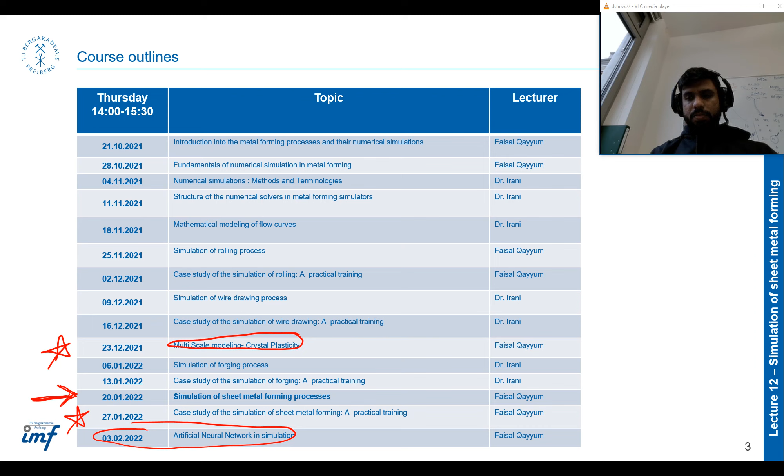In today's lecture, we want to understand what sheet metal is and why its forming is so important. We will also understand the attributes and properties of sheet metal and how they are slightly different from bulk materials. We will learn simple calculations for different sheet metal forming operations, then apply them to solve related problems. To clarify the concepts, I have sorted out some videos which we will watch together and discuss to see what we learned and how the different processes can be helpful.

So we will start with sheet metal forming. That is a very specific technical term. Do you know the difference between a foil, sheet, and a plate? I will start a poll for that: do you know what is the difference between a foil, sheet, and a plate?

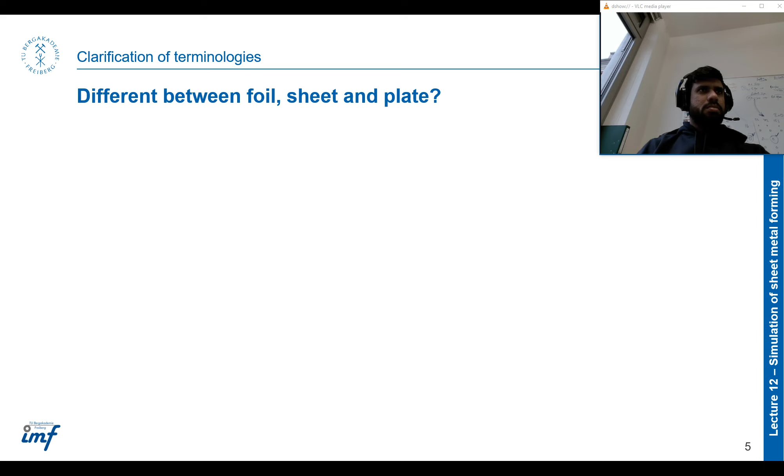So sheet metal with a thickness of less than 0.2 millimeter is considered as foil. Sheet metal with a thickness of more than 0.2 and less than 6 millimeters is considered sheet. So that is the tolerance we will be talking about today, and we'll be discussing it in most of the cases. Blocks with a thickness of more than 6 millimeter are considered as a plate.

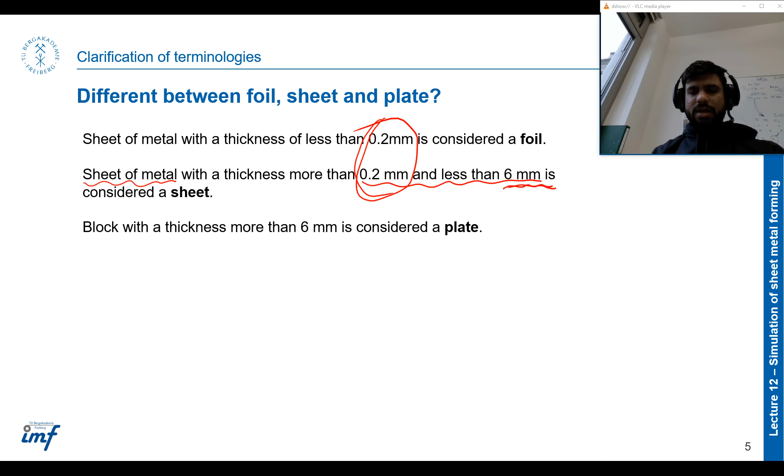I hope that is clear now. So today when we talk about sheet metal forming, we will be talking about these limits between 0.2 and 6 millimeter. Depending on the book, depending on the blog, these dimensions are slightly different. The 6 millimeter is quite conclusive, where all researchers agree, but the 0.2 millimeter can slightly vary. And then I have another question.

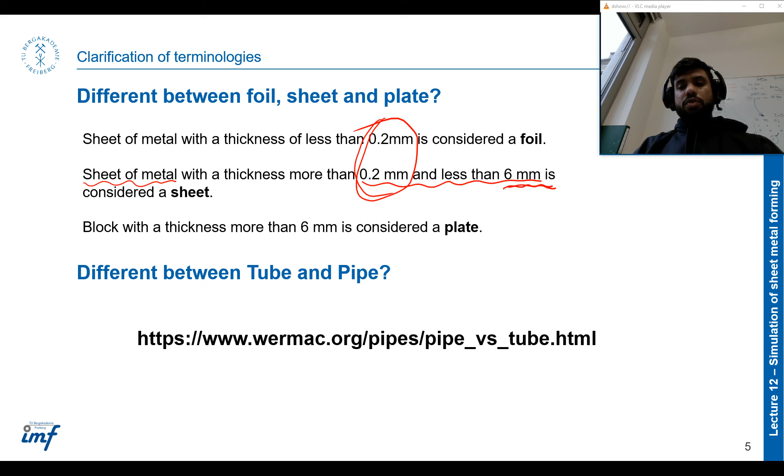I will publish this poll and move on. But if you want to know about it, there is a very nice link with all the details about the differences in pipe and tube, but you can also search it anywhere you want. I intentionally put these questions at the beginning because in your study period, or after you finish this course, you will come across many questions which you won't know the answer to, but will be important to solve a problem or go further. You should have a habit of finding the answers online and doing a simple quick Google search to find out all the answers.

So now that we have defined what a sheet is - basically a thin piece of material with thickness between 0.2 millimeter and 6 millimeter - this kind of shape has specific attributes and properties attached to it. One of the main properties and attributes attached to it is anisotropy.

The students write pipe is a vessel while tube is a structure - true, it depends on how you're defining vessel and structure. Pipe is a hollow section with round cross section for the conveyance of products, including fluid. Yeah, they're all correct answers. But there are many things which distinguish a tube from a pipe, depending on the application, the internal radii, the thickness of the wall, and so on.

Again, this is not the topic of today's lecture, so we are not really going deep into it. But it's important to know that, and you don't have to remember it when you can just do a quick Google search and find out all the answers.

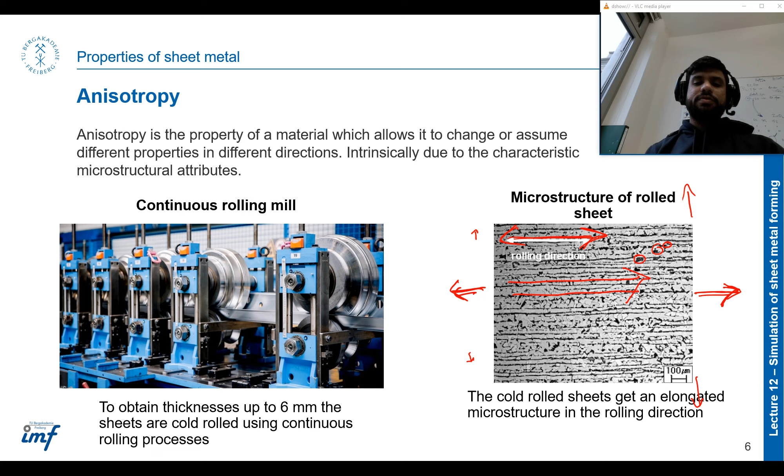So it is always complicated to choose the sheet and understand its anisotropy or do normalization and so on. But just know that sheet metal will have this intrinsic anisotropy attached to it. So we either have to know it or resolve this issue by normalization.

And then the other thing which sheet materials have is they basically are plane stress systems, which means that when there is very little thickness, we can assume that there will not be any stress in the third dimension, the z direction, and all the stresses are basically present in the x and y direction, as shown here in this picture.

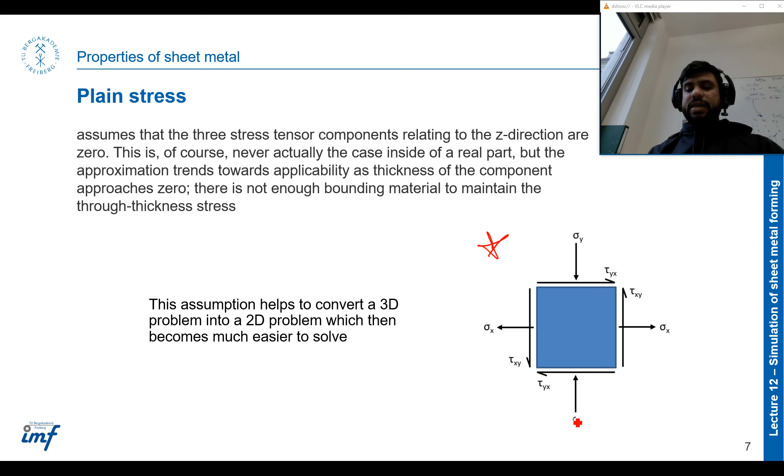So when we apply load in the x direction, we assume that the material will only decrease in the y direction. So if there are positive stresses in that direction, there are only negative stresses in the y direction, and because its thickness is too low, there will not be any stresses in the z direction, and we call this a plane stress condition. Also, for shear stresses, all the shear will only be present in the x and y axis and not in the other axis.

This assumption helps to convert a 3D problem, which it actually is, into a 2D problem, which can then become much easier to solve analytically if we want to do that.

And also, this is an assumption which we take in numerical simulation models, where we take a sheet and along its thickness we consider it as a plane stress sheet, so the computer does not have to solve all the equations in the third dimension but only in two dimensions.

So that makes the equations very short, simple, relatively easier and faster to solve, and yet the results are not much different. Of course, this is an assumption which makes the results slightly different, but depending on the case, the results are not highly different, and we can get the desired results quite quickly. So that is also something attributed to sheets, that generally the plane stress condition exists in them.

And after the assumptions, let's come to a point on why sheet metal forming is so important. When we want to discuss this, it is important to understand that our lives are surrounded by sheet metal components, for example automotive body parts, aircraft frames, and major home appliances.

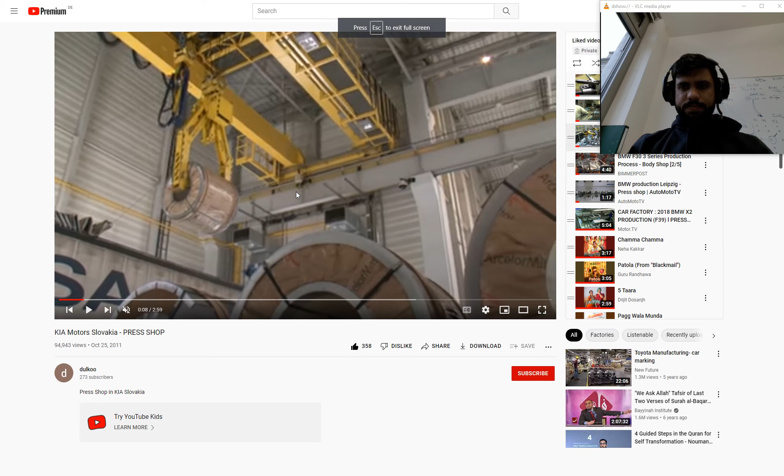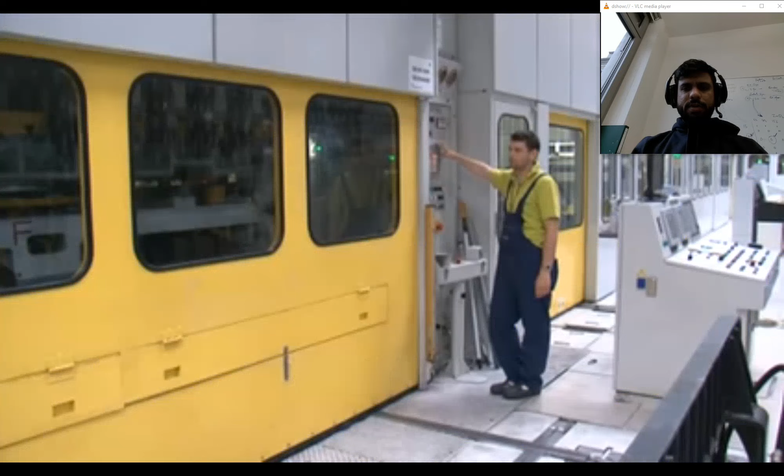So this is an example of how the car body parts are generally manufactured. So you see here that all the sheet metal rolls are coming into the industry. Here they are being unwound. The roll is being opened and then fed into the cutting press, which does blanking.

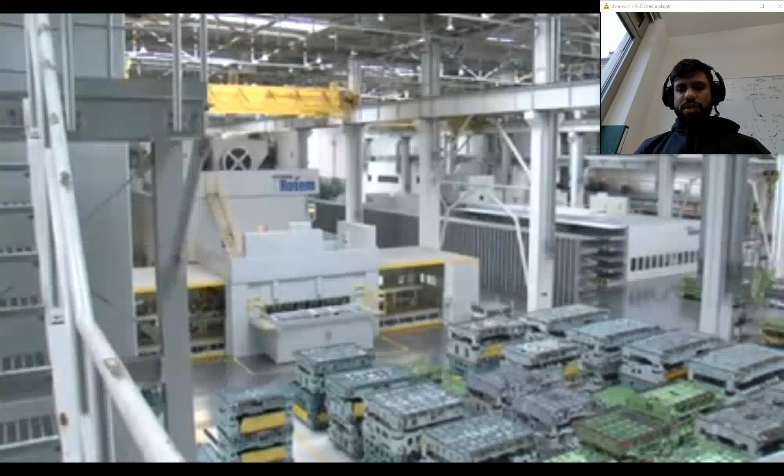The process is called blanking, where sheet metal parts are cut out of the whole big product, and now they're being stored in the store for later use. And here you will see the press shop.

These are the dies which are used to do the sheet metal bending and drawing and all those steps needed to convert these flat sheets into the desired shape.

So now those cut parts are being fed to the press. What is happening here is that the dies are being sent into the press. So now you will also know the trends of Industry 4.0 and automation, where the dies are automatically going in depending on which parts we want to manufacture, and then those flat parts are being fed into different dies.

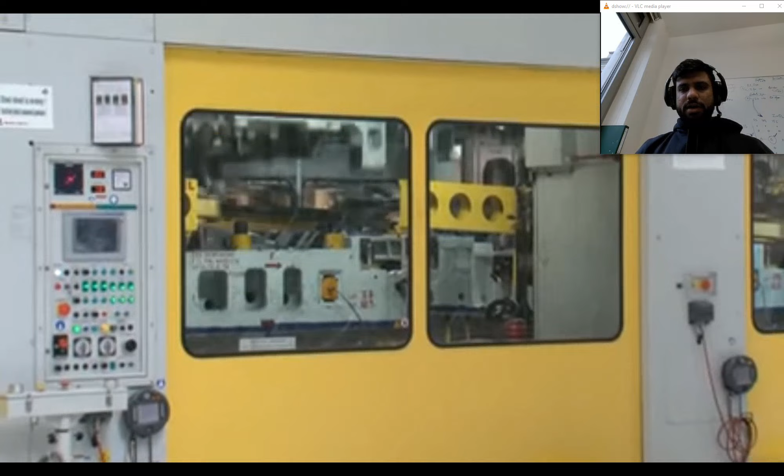Are being formed at different steps, and then you see here that the formed parts, the sheet metal formed parts, are coming out. So this complex forming is not done in one step, it is done in multiple steps. It is a combination of sheet drawing, sheet bending, shearing, forming, and in the end we get these kind of complex shape parts.

The example is for a car, and then these parts are being stored in the store again for later use. Depending on which model they want to manufacture, depending on how and when and where the model is being manufactured, different parts are then extracted from the stores and shipped to the site where they are used.

But the video ends here, where they are doing an automatic inspection of the part with a 3D scanner, which shows how the tolerances of the shaped part compare with the actual geometry they gave in.

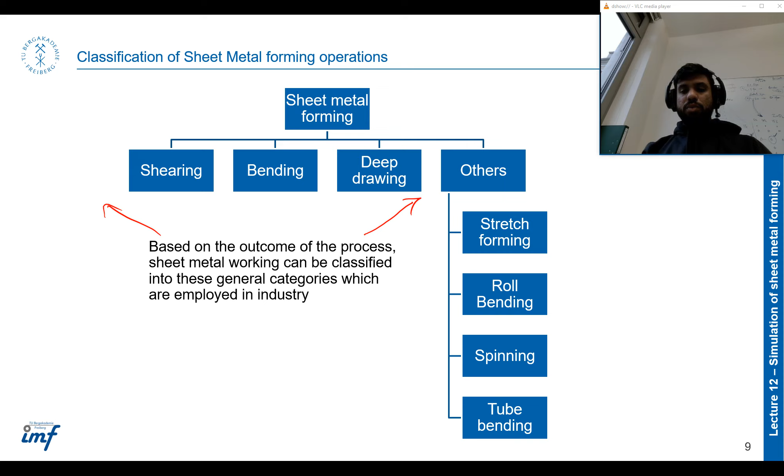The sheet metal forming operations can be generally classified into the following categories. Based on the outcomes of the sheet metal working, they can be classified into processes where one is shearing, one is bending, and one is deep drawing. We will study them one by one, and see what they are and how they perform.

On the other end, we also have operations performed without presses. These operations are basically stretch forming, roll bending, spinning, and tube bending. That is also something which we will study today, probably not tube bending, but all the others.

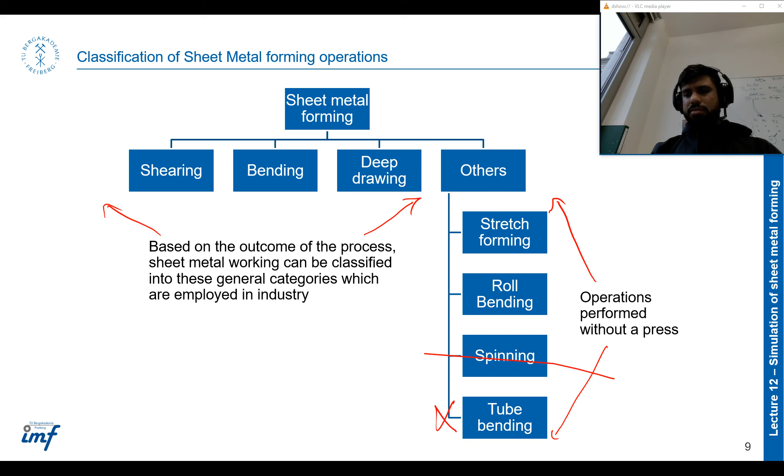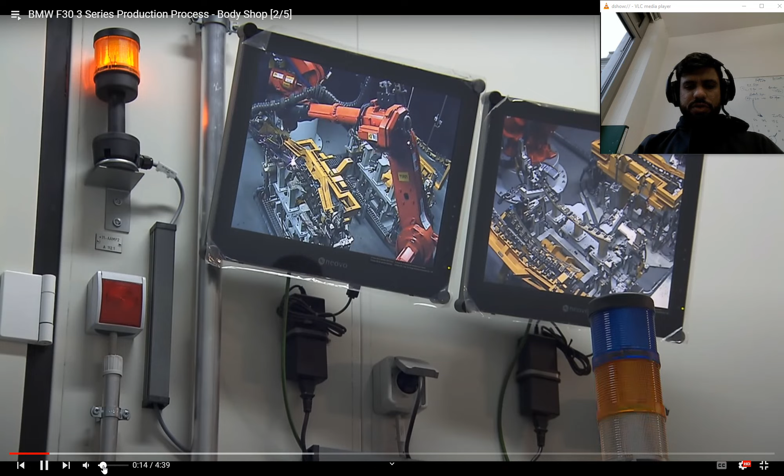In the previous video, you saw how the rolled sheet metal comes into the factory, how it is blanked into the desired blocks, which are then used to form and make into the desired shapes. Now this is basically the next step which comes in car manufacturing.

All those blocks come down from the store into the assembly plant, where you will see the robotic arms actually picking them up from the conveyor belt, putting them in the jigs and fixtures at the right points, and then welding them together to form components which will later be used in the cars.

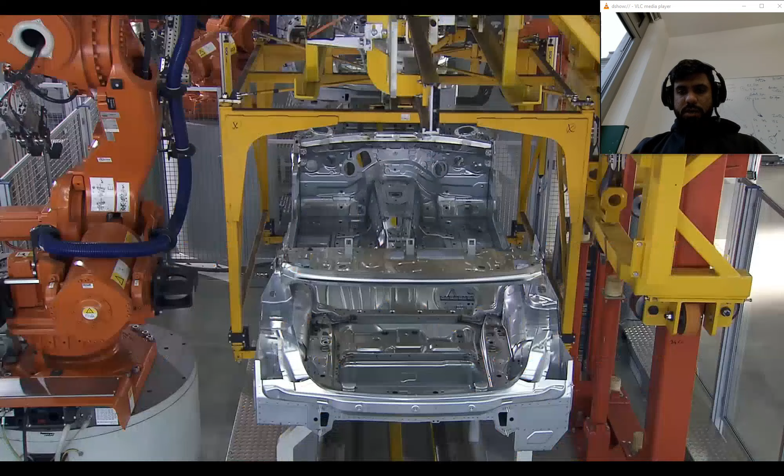There is a big skip here, but generally you see how those components, individually built together one by one and welded together, form this basic car frame. A lot of operations are going on, where parts initially joined with a few spots are then welded together more strongly using spot welds.

This is the basic car frame, and the process goes on where it slowly takes the shape of a car. Spot welds are still going on, and if you look at this structure, more than 95% of the components are sheet metal parts joined together using spot welds—a few are just bars.

The video will go on to include more larger components to this block, and it will directly take the shape of a car. I'm just waiting for that to happen.

On the punch and die, I want to show it to you. Let's see where I can show that - we can start a whiteboard and clear canvas.

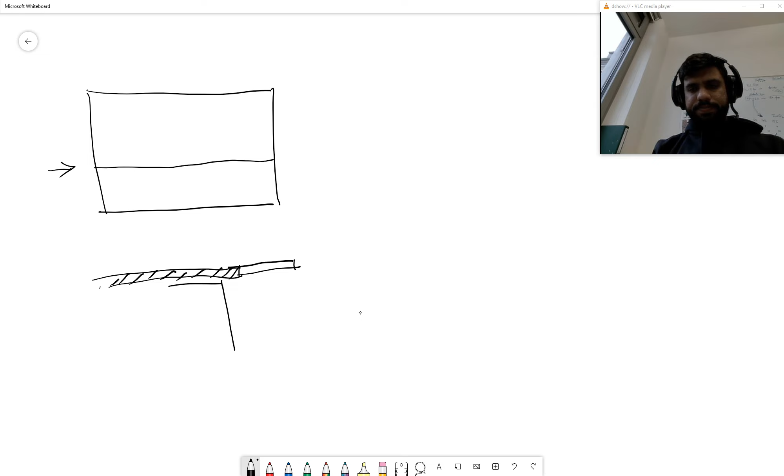Okay, so for example, if we look at it, let's take an example of a sheet which I want to cut from here. If I put it between the die and the punch from this side, it will look like this - this is the sheet, a little longer, and this is my die, this is my punch. And from the front, if I look at it from here - so this is the side view and this is the front view. The sheet is here.

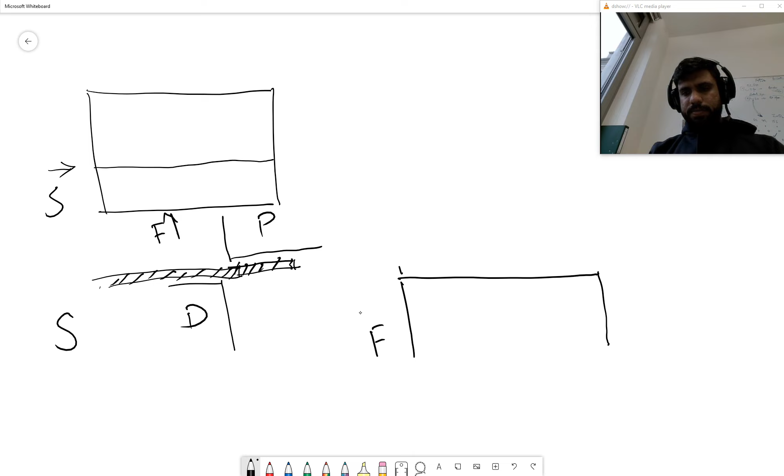This is the die, and my punch is like this. So when I press it, it will simultaneously be in contact with this whole length, and it will cut it. But this will result in maximum force. And what we do instead is...

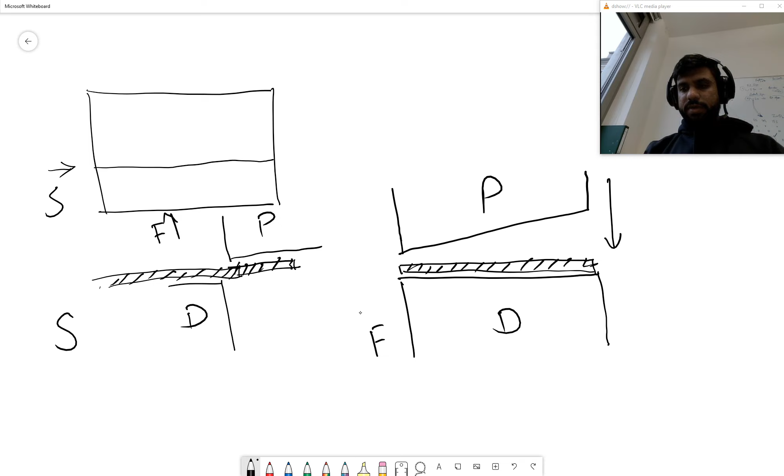We use this kind of punch. So what it does is it comes in - when we press it, it comes in contact with only this section of the sheet, and then when this is cut, it comes in contact with this section of the sheet and this section of the sheet, and that is how we reduce the amount of force needed for the shear. And similarly, we can also do it for a circle and so on.

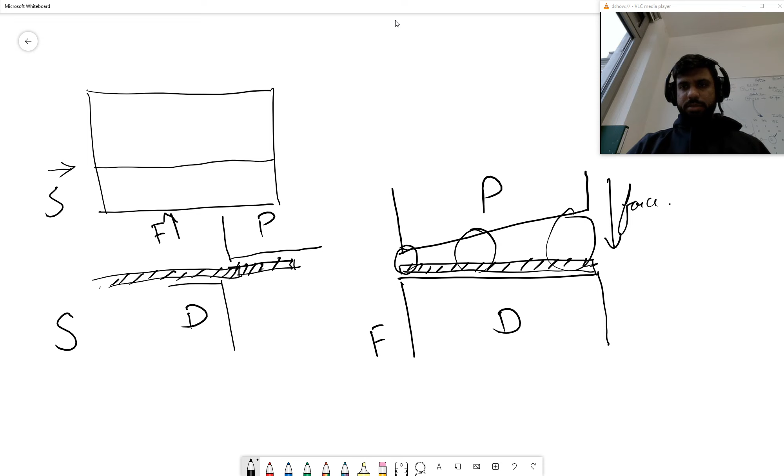I hope it was understandable with this kind of schematics.

So this force calculation is basically for the total complete cut. Of course, it can be significantly reduced if we do incremental cuts. Like in the case of scissors, when we cut something, we require very little force because we are only cutting a very small area, and then we incrementally do that. The total amount of energy required will still be the same, but the amount of force required at one moment will be smaller.

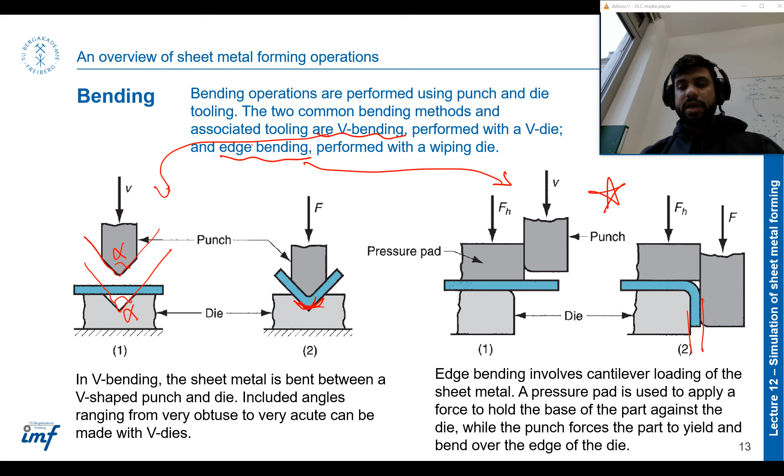Now in both these cases, there is a difference in the angles, and for example, in this case, there is a gap between the die and the punch, and this is called clearance. We need to cater for this depending on our angle of bending and so on, and we call that bending allowance.

It's important to understand that if the bending radius is small relative to the stock thickness, the metal tends to stretch during bending. So, for example, if I want to bend a sheet, let's try to make it as close to reality as it would be, and I will put my punch very close, and then I would try to force it.

What will happen is that this sheet will get thinner at this edge during bending, and that is what we don't want it to do, because it will reduce its strength.

So what we want to do is calculate this - we call it AB, bending allowance. We want to calculate it more accurately, so we can give this bending allowance between the die and the punch while bending our sheet, so it does not stretch and does not lose its strength.

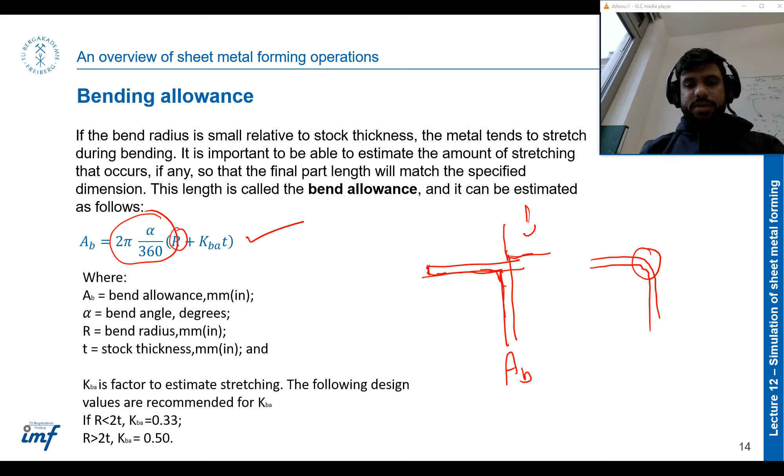And the formula to do that is given here, which seems relatively complicated, but it is quite simple, where this is basically a calculation for the bending angle, and this is basically the radius of the bend. So there are two things - let's take an example of this.

So one is this angle alpha, which is given here, and the other is this radius of bending. And then of course we have our thickness of the sheet, and then there is a constant factor to estimate stretching. Generally, the following design values are recommended: if the radius is less than 2 times thickness, this value of Kba is used, and if the radius is greater than or equal to 2 times the thickness, then we use this other value. From this formula we calculate the bending allowance.

There is also an intrinsic attribute called spring back, associated with the sheet metal bending operation. Because what happens is that when we deform a material, there are two components: one is the elastic deformation and the other is the plastic deformation. Plastic deformation is the permanent deformation, and elastic deformation is the one which is elastically stored and then just recoils when we remove the load. In the case of bending, this is quite significant, so we want to calculate the spring back in our sheet metals.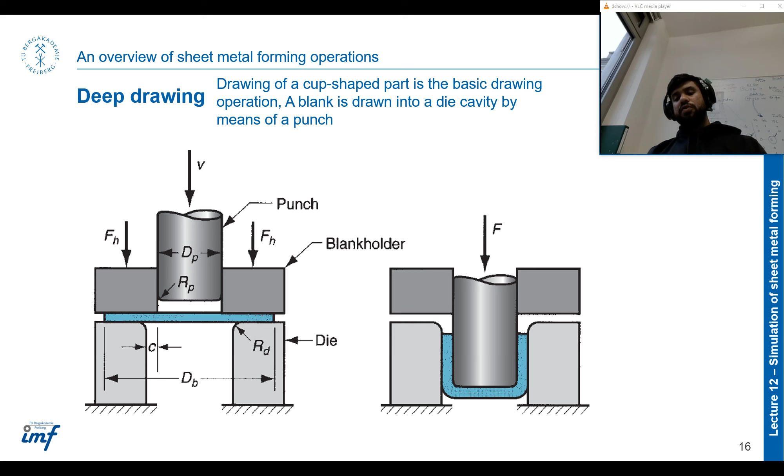The details of the process are given here. For example, when the punch first begins to push the work, the material is subjected to a bending operation — we see bending taking place here and here. Then as the punch moves further down, in case of this figure, a straightening action occurs: there is a bend first and then it becomes straight here, where it was previously bent over the die radius. This causes a strain hardening effect in the material because we are bending it first and then straightening it later, which makes the wall of the drawn part relatively stronger than the lip or the bottom of the part.

Then what happens is that for the material in the flange to move towards the die opening, the material wants to flow in. There are two kinds of forces acting: one is a hoop stress here at the lip of the part, and the other is the tension which is pulling the material inwards.

The surface of the blank holder and the die matters because for the material in the flange to move towards the die opening, the friction between the sheet metal and the surface of the blank holder and die must be overcome.

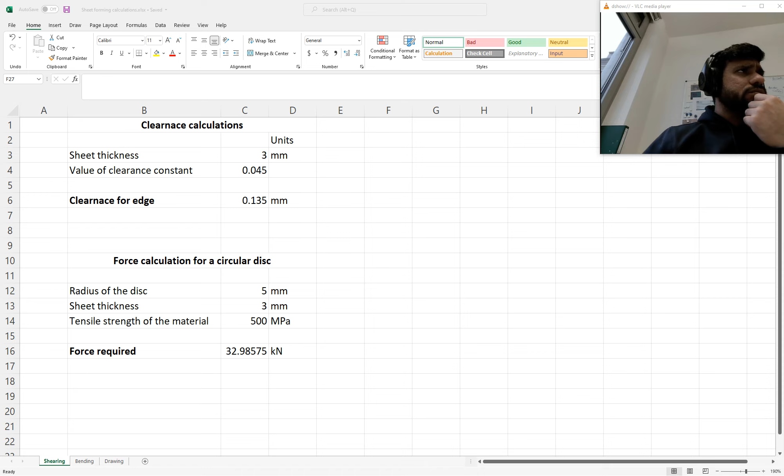What I would like to do here is show you that this Excel file contains three different sheets. Below here, if you take a look, there are three different sheets: one is shearing, the second is bending, and the third is drawing. The formulas we saw on the slides have been incorporated into this.

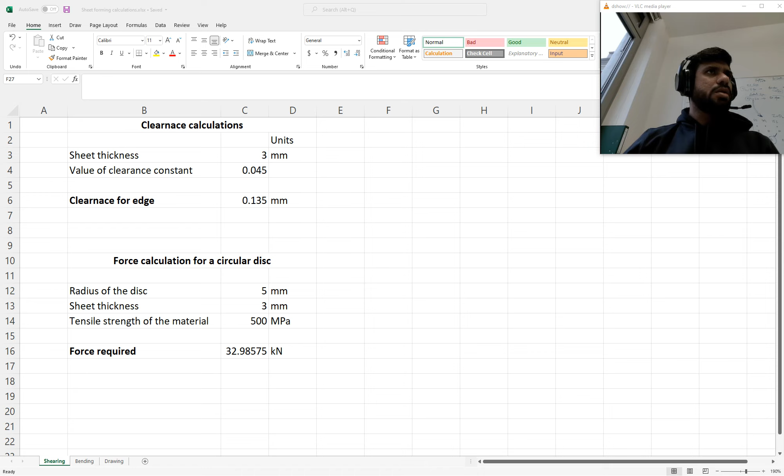So what I've done is I have incorporated them here in this list, in these individual sheets, and you can play around with them. For example, if you want to do some shearing calculations, you can write the thickness of the sheet, which can be, for example, let's say...

4 millimeters, and the value of the clearance constant. Do you remember we studied about it? If the material is very soft, the value is 0.045. It's a drop-down menu, and if it's medium hard, the value is 0.06, and if it's very hard, the value is 0.075.

Let's assume the material is super hard and the value is 0.075. Then the clearance for the edge should be 0.3 millimeter for a 4 millimeter sheet. And if it's 0.06, then the clearance can be less, and for 0.045 the clearance can be super low.

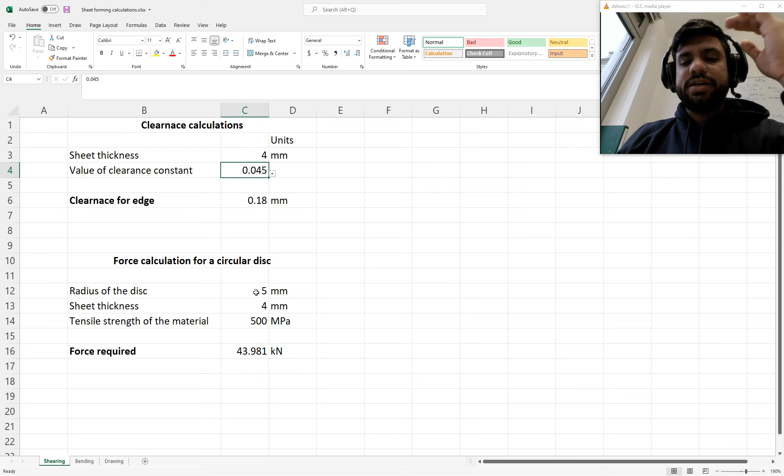Okay, and then what we want to do is force calculations for a circular disc. I'm doing the force calculations for a circular disc, but you can also make a similar sheet for straight cuts. So I say here that the radius of the disc is, let's say, 7 mm, and the sheet thickness is, let's say, 2 mm.

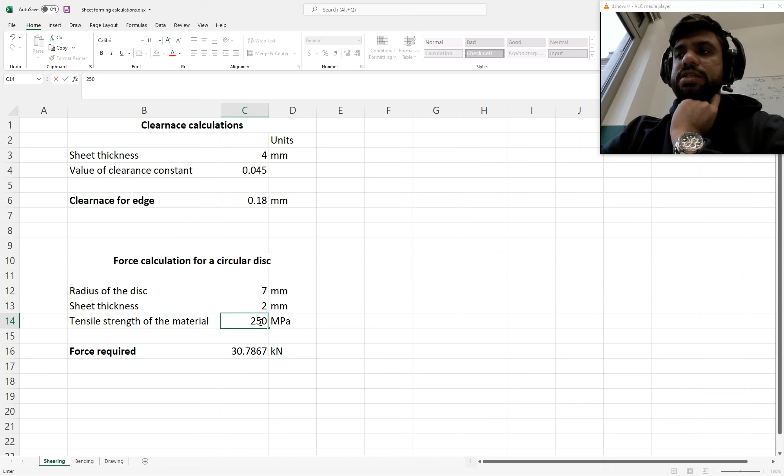And the tensile strength of the material depends on the material, and you would know that from testing the material, which is also something we've discussed before. But let's say it's a very soft material and the tensile strength is 250 MPa, then the force required to shear the sheet all at once is 15 kilonewtons.

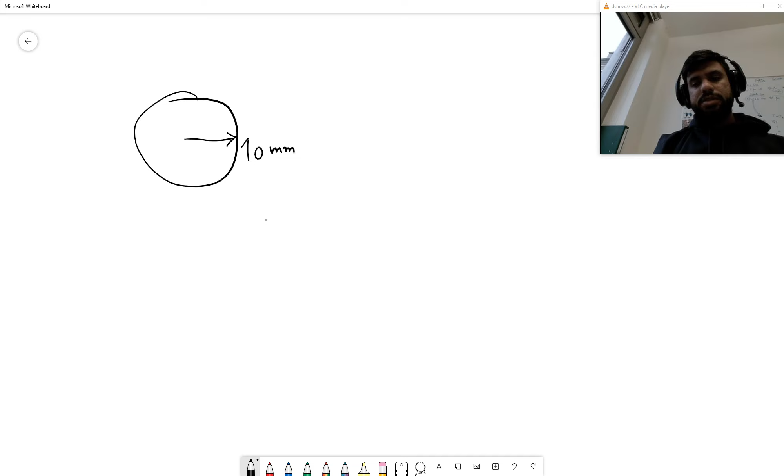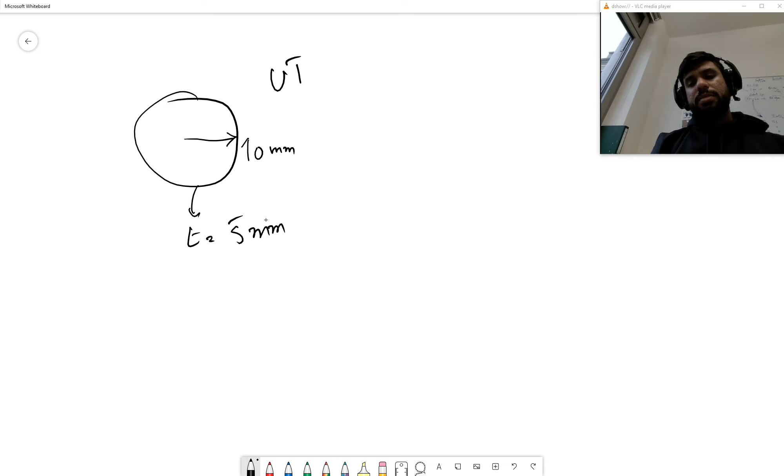Now let's do another case study. I want you to do a calculation for a round sheet which is 10 millimeters radius, and the thickness is 5 millimeters, and the ultimate tensile strength is 400 MPa.

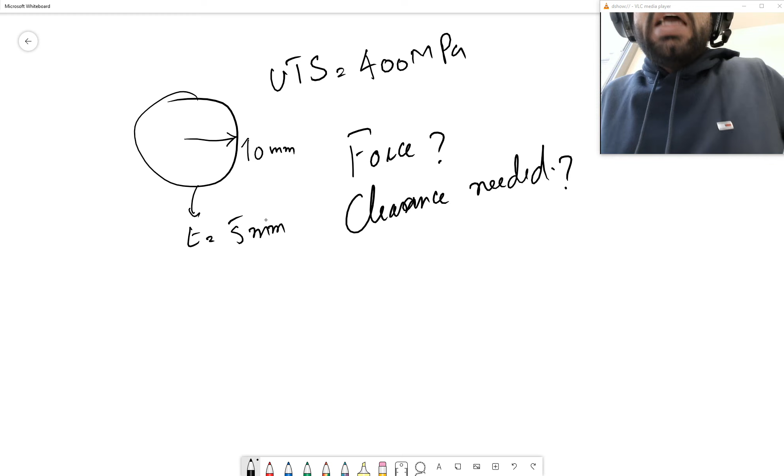I want you to find the force required as well as the clearance needed for this case. You can just quickly do these calculations using the sheet, and write your answers in the comment section here, and then we can move forward with the further calculations.

Clearance is 0.3 and the force required is 87.962 kilonewton. Interesting, but for the clearance, which hardness of the material did you choose? That is what I would also want to know, and why.

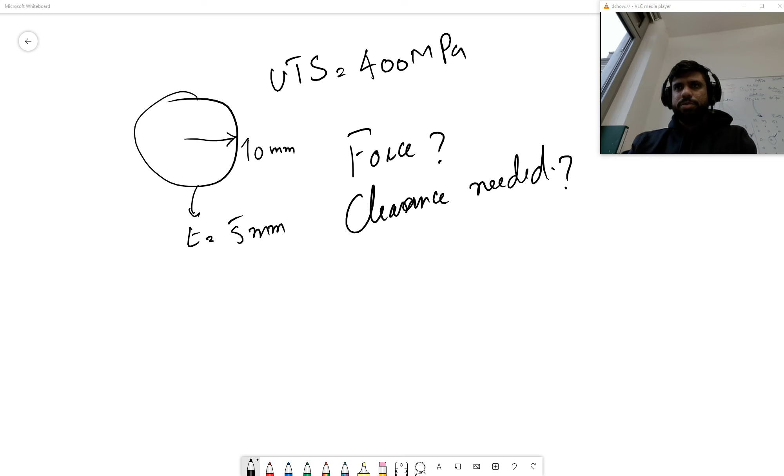Super, that's good to know. And interesting, I see you are getting along. Okay, so now we have a different clearance, 0.225, and of course it would vary because of the value of the clearance constant which everybody is choosing. But it's okay and good.

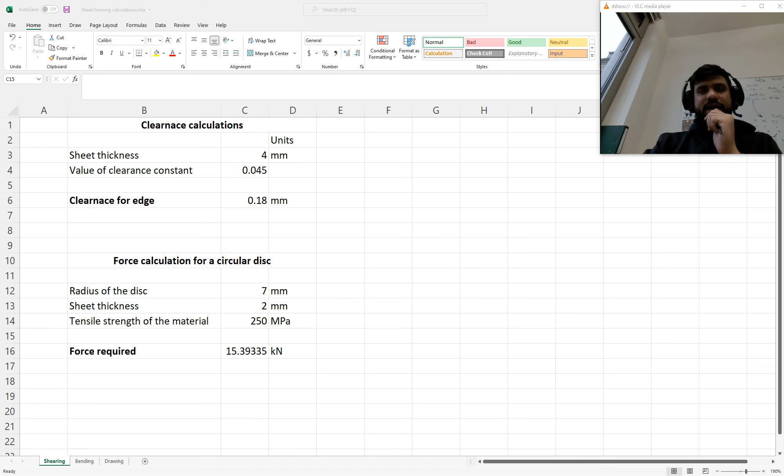Now let's go to the next sheet, on bending. There are other calculations for bending, but here we are just doing very simple basic calculations, putting the values of what we need. So let's say the bending angle of the tool is 70 degrees, and the bending radius is relatively larger, let's say 7 millimeters, and the sheet thickness is relatively higher...

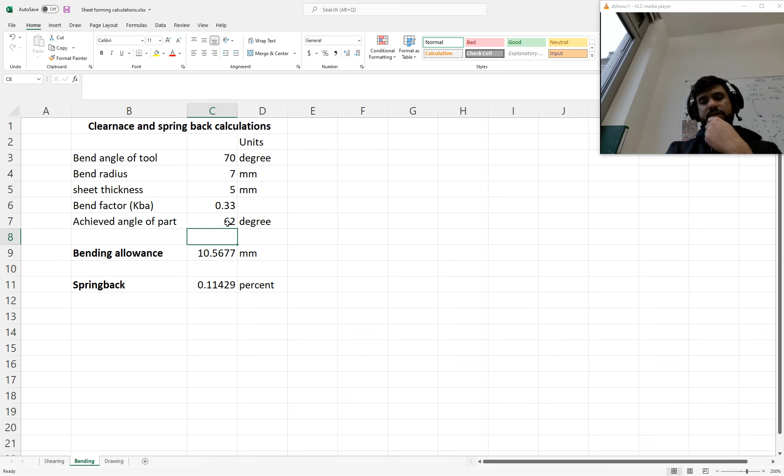5 millimeters. Here I have applied a conditional, so the bending factor is automatically chosen based on the values we give, and then the achieved angle of the part, let's say it was supposed to be 70 and we achieved 62 degrees. So we see that the bending allowance should be 10.56 millimeters, and the spring back in the sheet, depending on the achieved part angle, is around 11%.

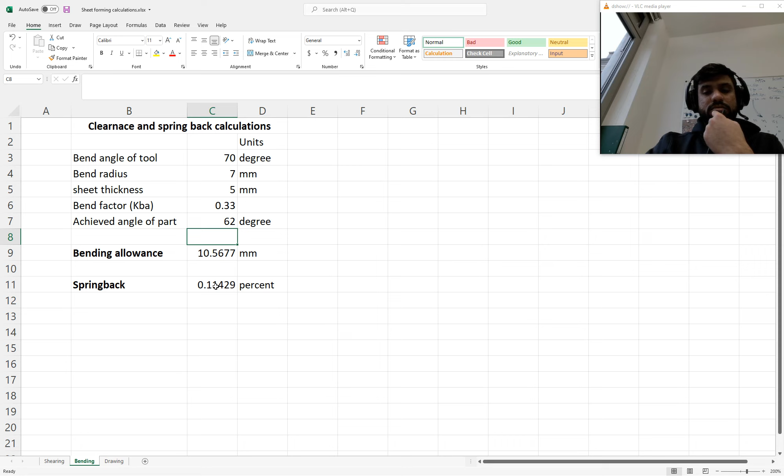No, this is not correct. It is basically not in percent. So this is basically a 0.11 ratio, which corresponds to 11%.

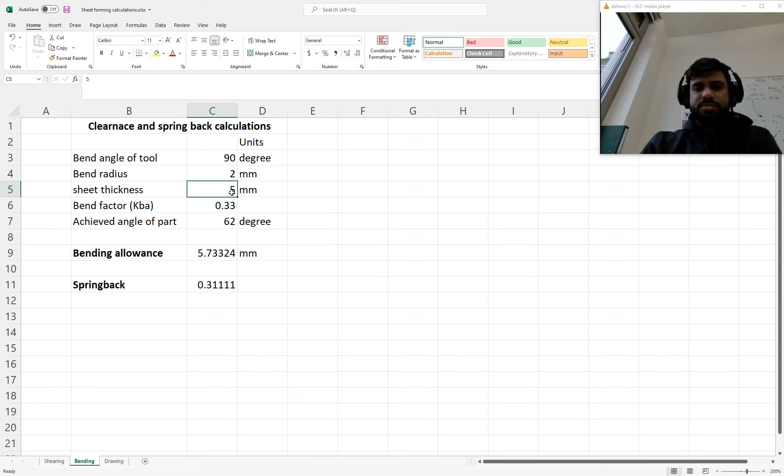Now let's take another example where we are bending it to 90 degrees. The bend radius is quite small, 2 millimeters, and the sheet thickness is also 2 millimeters. The bending factor is still 0.33, and the achieved bend angle in the sheet is 80 degrees. So we see that the bending allowance is 4 millimeters only, instead of 10 millimeters as previously. This is how you can use this sheet to your advantage.

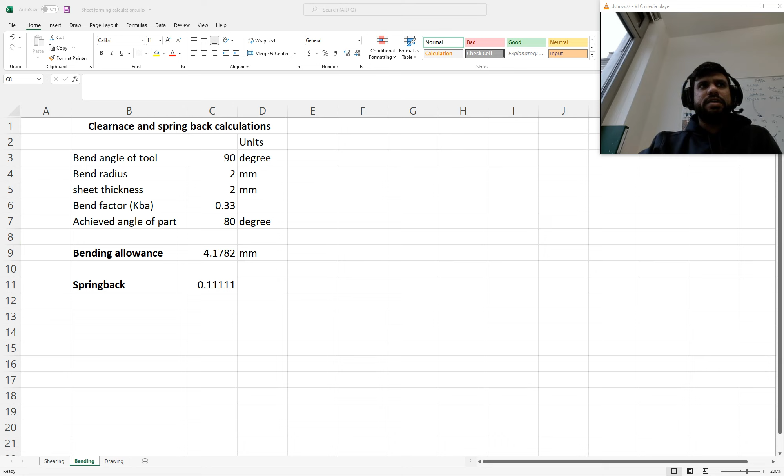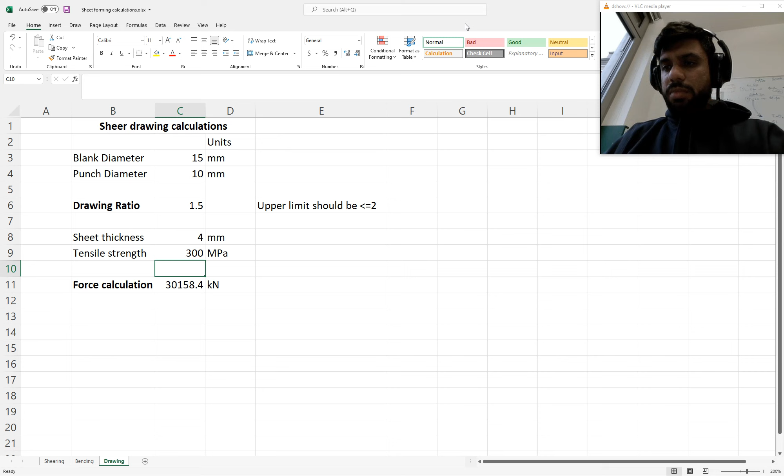Now, these are the basic general sheet forming processes, and we want to talk a little bit about special processes.

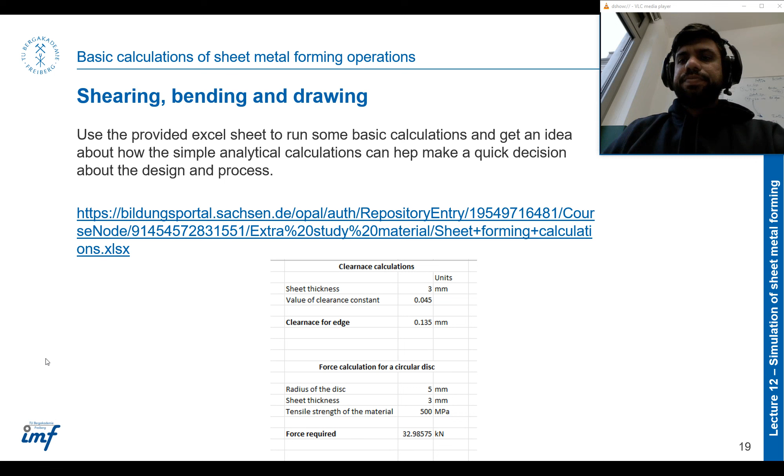Then there is the roll forming operation, which basically uses a combination of rollers. It's a continuous bending process in which opposing rolls are used to produce long sections of formed shapes from coil or strip stock. Several pairs of rolls are usually required to progressively accomplish the bending of the stock into the desired shape. There is a very interesting video about it.

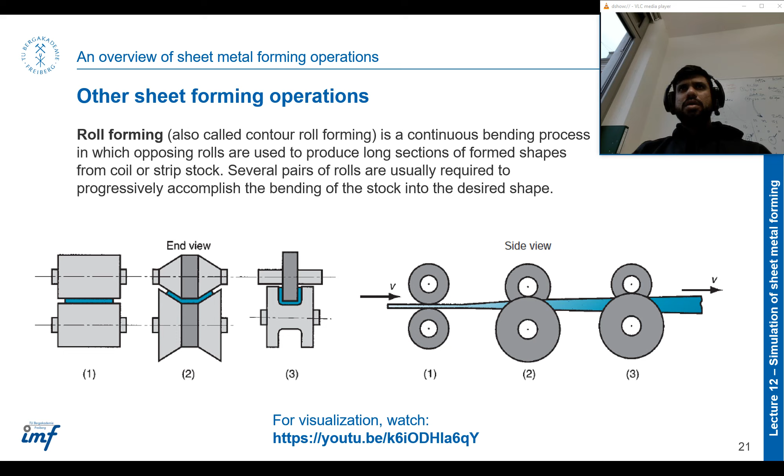Let me see, where is that roll forming video? Yes. So let's watch this video together. Oh, come on.

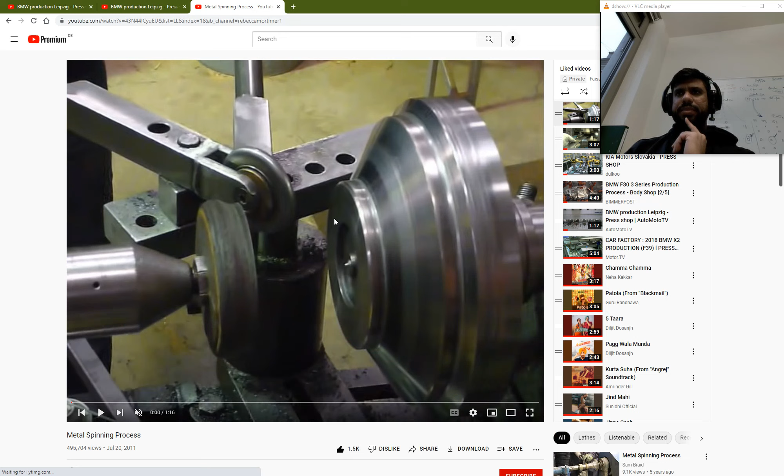Okay, interesting. And then what I would like to quickly reach is, where was I? Yeah, and then I would like to quickly address metal spinning.

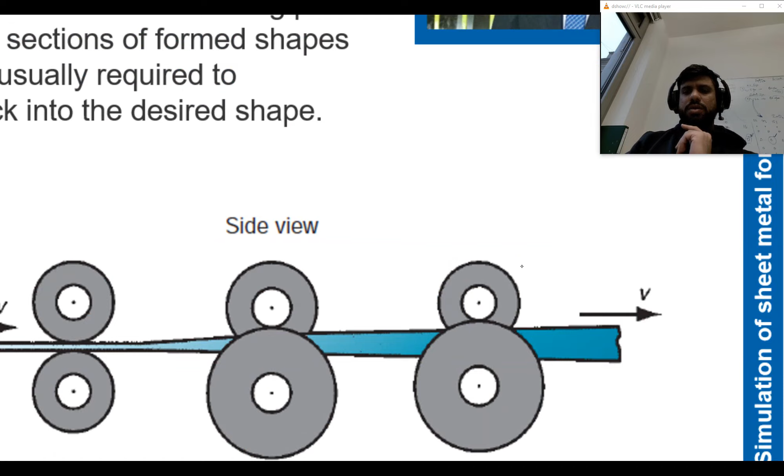Metal spinning is a method of forming rotationally symmetrical sheet material parts. In spinning, sheet metal discs are formed into rotationally symmetrical hollow shapes. The blank is clamped between a clamp and the die. The die rotates at very high speed, and we use a rolling tool to shape the sheet metal onto the die, and in the end we achieve our parts. I found a short and interesting video to explain this concept as well, which we can see here.

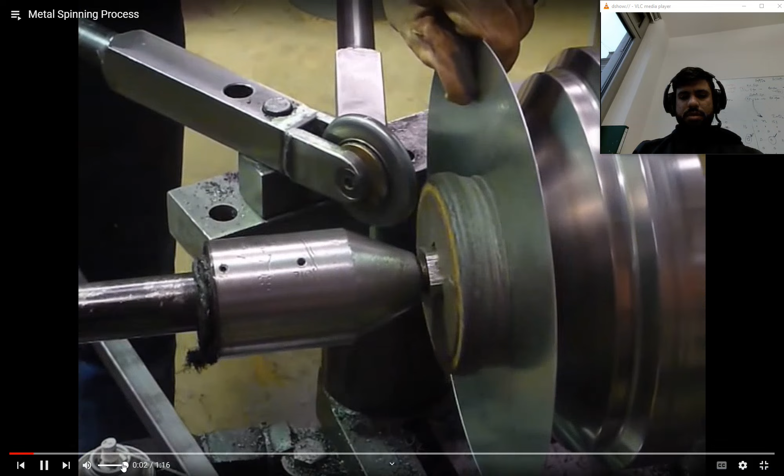Here you will see that sheet metal is held between a clamp and a die, and then we have a forming tool which is used to shape this sheet and cover it over the die. Then you will see there are different steps involved in shaping it more accurately and precisely. Here the work is being done manually, but of course it can also be done using a numerically controlled or computer numerically controlled machine with more accuracy and consistency.

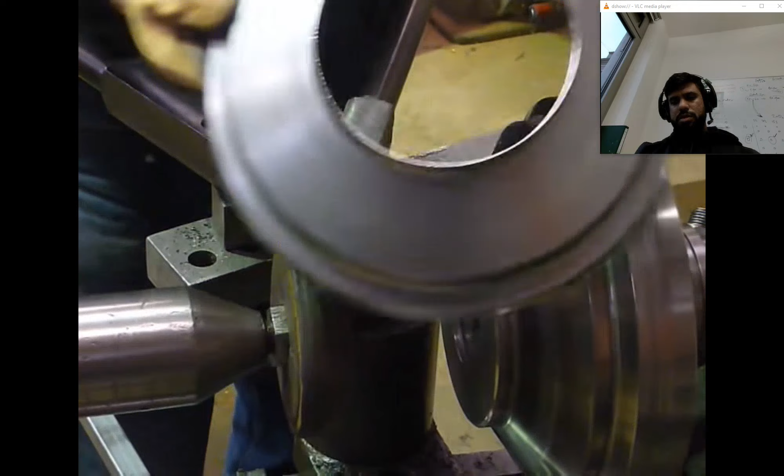And then now what they're doing is, depending on the part which they needed, they're just cutting into the end of the part. Stopped it, the part is cut, and here we get the desired component.

So yeah, that's about it.

And now we come towards the conclusion. So in today's lecture, we studied what is sheet metal and why its forming is so important. We tried to understand the basic attributes and properties of sheet materials, and the classification of sheet metal forming.

We learned to do simple calculations for different sheet metal forming operations. We used the developed sheet to apply these calculations for solving simple related problems, and of course such sheets can be made for relatively bigger and more complicated formulas, depending on your needs and requirements in the future. We also clarified the concepts of some more complicated sheet metal forming operations using interactive videos.